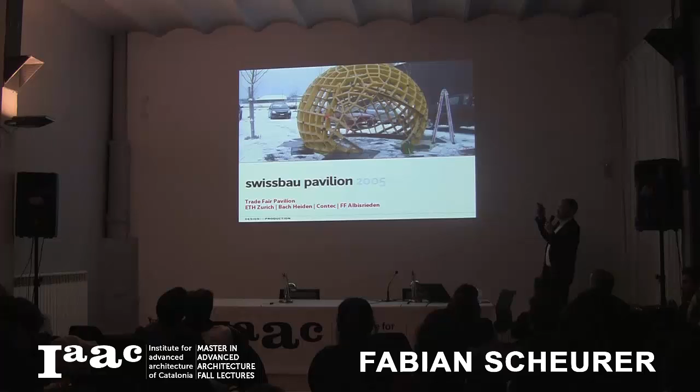And I start early on. As has been said, I was working at the ETH Zurich, at the CAD chair there, for a couple of years, and this basically is the first Design-to-Production project ever. Actually a university project that we built for the Swissbau Fair in Basel in 2005, out of the university's computer-aided architectural design chair. And the goal actually was to prove that there is something like a digital chain from design to production. So this is a small sphere about 4 meters in diameter. The idea was to have the sphere and a few square openings in that.

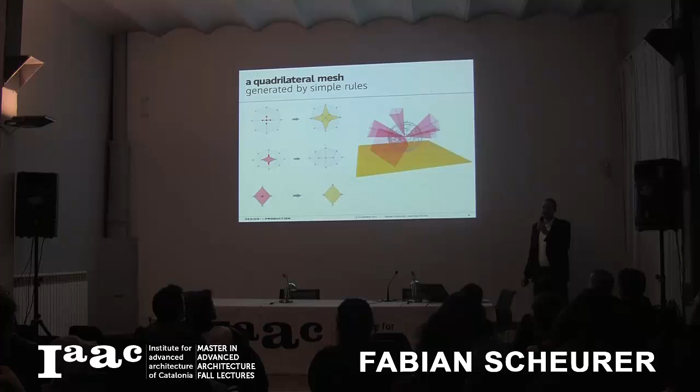And as has been said also, I was working on methods for artificial life or self-organization for construction principles. And this is basically the principle behind this sphere. There's a quadrilateral mesh growing on this sphere. In this little video you can see it here in real time, more or less, based on a few simple rules that ensure that the thing is always quadrilateral. And that was not just a nice idea. Triangulating a mesh is easy. Making a quad mesh on a sphere is difficult. No, the question also was, how do we build this thing in the end?

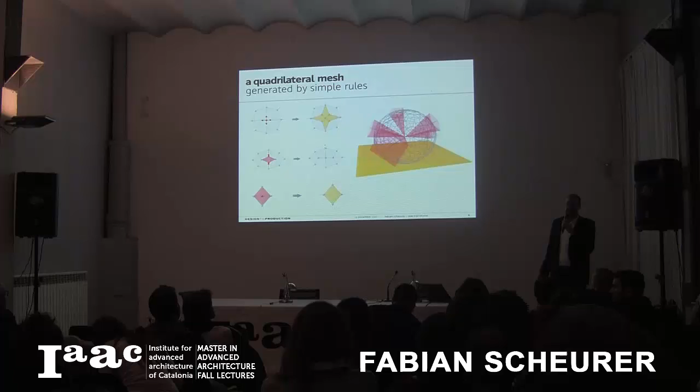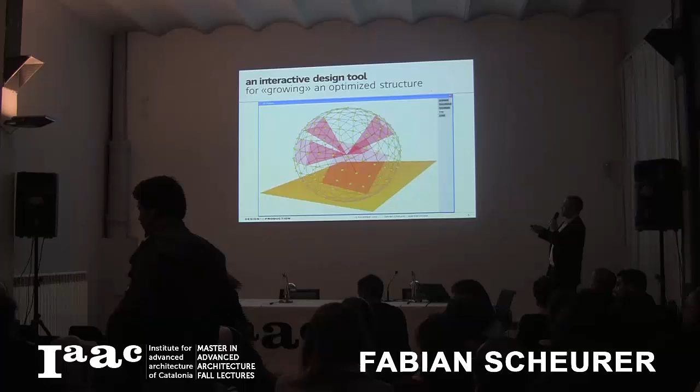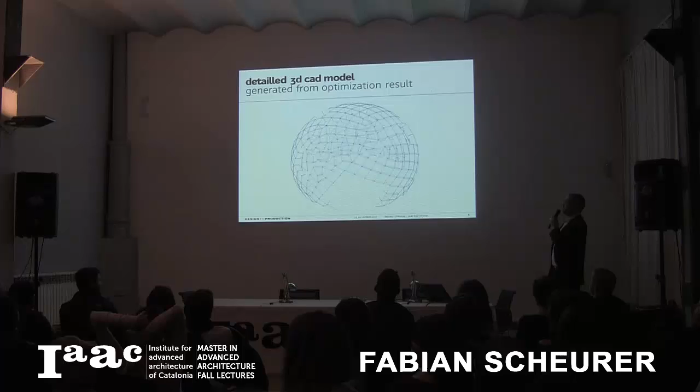The outcome of the software looks like this. This is basically the optimization result, and you can see that the edges of this mesh nicely align with these openings that we wanted to have in the end. A colleague of mine did a bit of scripting and translated this into a fully detailed CAD model of the whole thing. Then we put it down flat, all the nice pieces that had to be fabricated, and generated fabrication code for a CNC cutting machine directly from that.

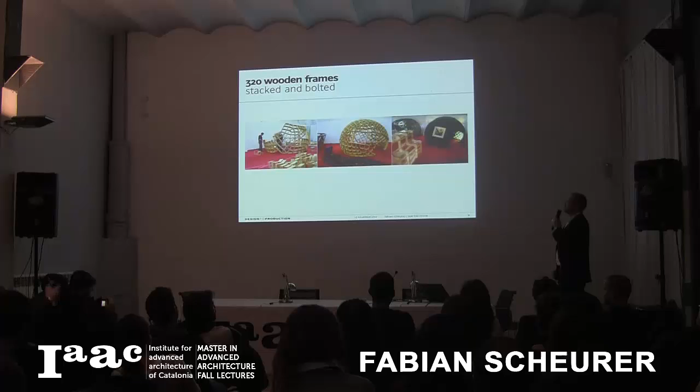We cut about 1,200 pieces, put them together in quadrilateral frames and stacked them like a big puzzle, one on top of each other. Looks pretty simple, actually looked pretty nice until we had to put this black membrane on top because one of the sponsors was a fabricator of membranes. The other sponsor was fabricating windows, as you can see. This is what it looks like from the inside, much more interesting.

So it's all quadrilateral frames, and the trick was that we had to fulfill certain requirements concerning the size or the length of the edges and the angles in which the four boards meet at the corners and stuff like that, and that was all embedded in this growth algorithm, basically, which was great for me because I was able to prove that my optimization software was working.

But also I learned another lesson, which is this so-called digital chain from optimization to digital detailing to digital fabrication, which is shown to you in slides of software representatives in this way, actually looks like that. It doesn't work that easy.

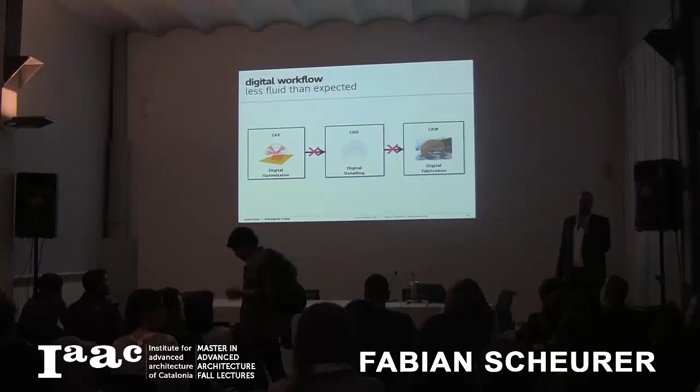There's a lot of handwork, manual work involved. There's actually a lot of project-specific programming involved because those interfaces simply don't work by translating one into the other and just shifting IGES or DWG or DXF or whatever files from A to B. Doesn't work.

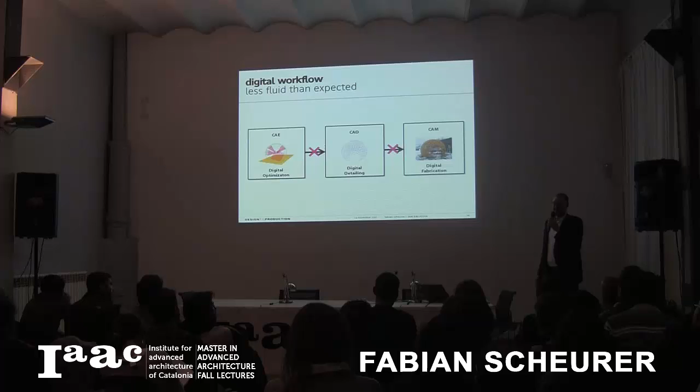One hint why that is the case is pretty obvious. There's too many degrees of freedom in the fabrication. If you have a laser cutter, you have two axes, X and Y, degrees of freedom of the laser cutter, and you have two dimensions in the material. Matches perfectly. Nothing can go wrong. If you have a three-axis mill, you have X, Y, and Z degrees of freedom in the three-axis mill, and you have three dimensions in the space you're working in.

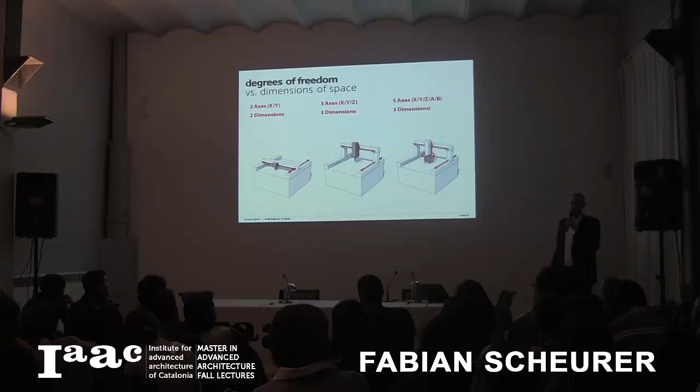If you have a five-axis mill, you have still 3 degrees of freedom in space, but 5 degrees of freedom in the machine. So, oops, things become ambiguous. Someone has to decide whether it's better to drive to this point from the left or from the right or from the top or from the bottom, which means software is not a good friend of yours anymore because this is getting too complicated. You need to know a lot about fabrication before you can start to work with a 5-axis machine, let alone a 7-axis robot like the one out there.

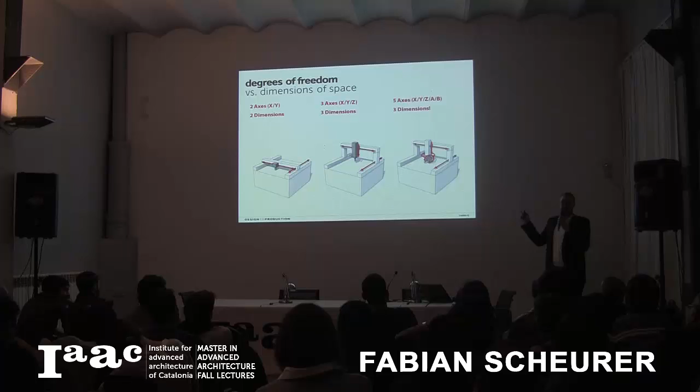So this automatic translation from, oh, we have a geometry here and we need a fabrication code for the machine on the other side, and we just push a button is not working. Very small, very early project, very, very good lesson learned there, almost 7 years ago.

Next project, still at the ETH, was this. This is an exhibition platform for the 4 schools of architecture in Switzerland. It was a traveling exhibition going once around the world, designed by a small practice in Zurich, Instant Architekten. Client was the ETH in Zurich. Fabricator was Bach Heiden, the carpentry that also built the sphere you've seen in the last project.

The thing is 40 meters long, 3 meters wide, and it's basically a landscape model. It's an abstracted cross-section through Switzerland, following the path along Geneva, Lausanne, Mendrisio, and Zurich, where the 4 architecture schools are. It started like this in the designer's office as a 1:50 model from cardboard and foam. And the question was, how do you build this on a real scale?

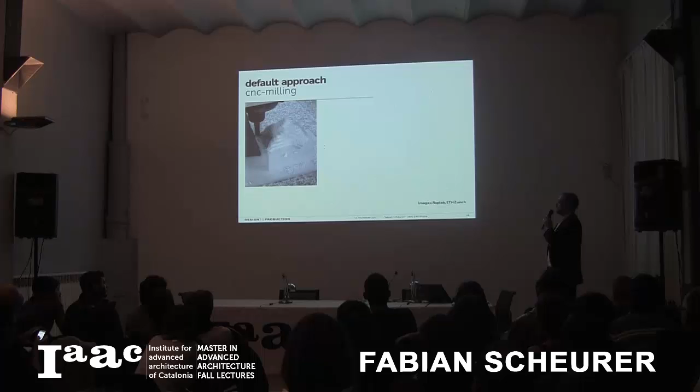I mean, there's a default approach for building landscape models, which is 3-axis milling. So you have whatever material, and you have a 3-axis machine, and you mill away a rough cut and a fine cut, and in the end it looks like that, the Matterhorn. Pretty straightforward. Question only is, if you have a 1:50 model, and it takes about 1 hour of milling time to do that on the machine, how long does it take to mill the 1-to-1 thing on the same machine? Any guesses?

It's actually pretty simple math. It's 50 times wider and 50 times longer and 50 times higher than the model. Times 1 hour is 125,000 hours, is just a bit over 13 years. Which means, no, not on the same machine. You cannot mill this out of foam and then coat it with fiberglass or whatever to walk on. You have to think about fabrication methods that are different than the model.

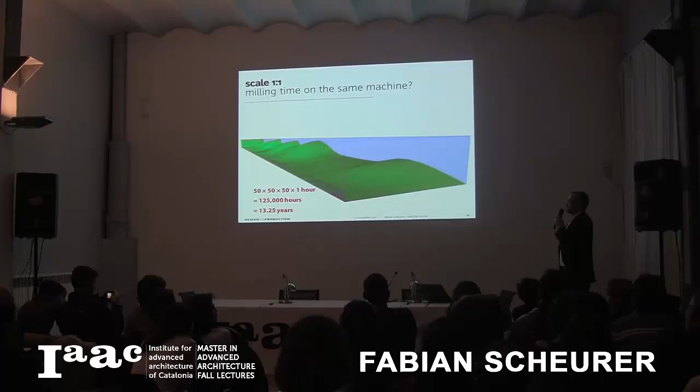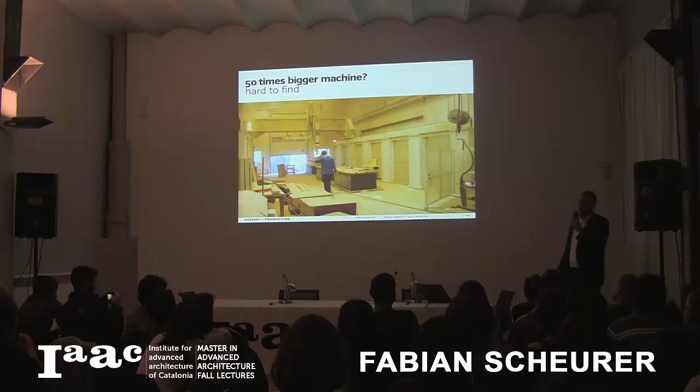Which means, oops, you can either try to find a 50 times bigger machine. This is pretty much the largest 5-axis mill I've seen in my life. It's in Norway in a boat builder's workshop. They're milling foam cores for race boats on this. At the time we were visiting them, they were milling the balconies for the Oslo Opera by Snøhetta out of oak.

If you have a 50 times bigger machine, you have to have 50 times bigger tools if you want to reach the same speed, which means your little tiny milling bit is becoming 50 times wider. This thing is only 15 centimeters in diameter, milling tool, which gives you a much lower resolution than you had with a smaller tool. You're seeing the traces here.

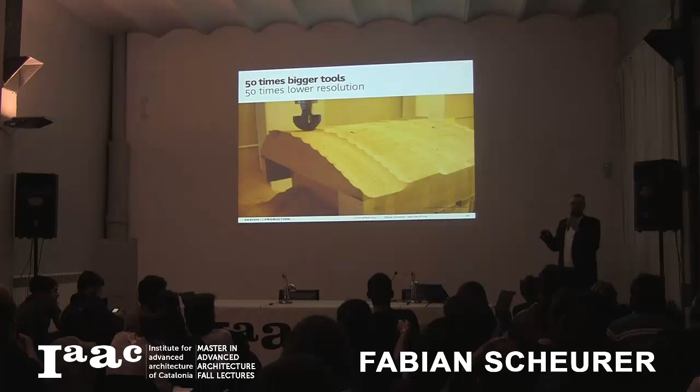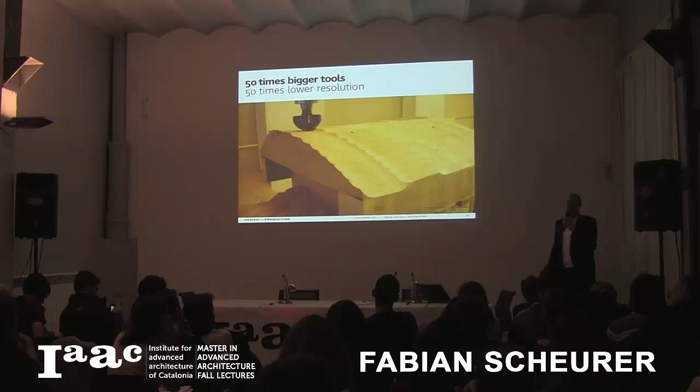And to reach the same speed again, in terms of I want to mill the whole thing in 1 hour, you have to move this tool at 50 times the speed than the small machine, which means you have to accelerate it on this end of the machine, like a Porsche on a German Autobahn, and then you have to make full stop on the other side, 15 meters to the back, turn around, and go back, which is physically impossible.

So instead of finding a 50 times bigger machine, we took a different approach. We took the cookie cutter, as we call it, and cut the whole thing in vertical slices of 40 millimeters. So 40 meters divided by 40 millimeters is 1,000 slices.

You get 1,000 individually curved rafters if you lay them out flat, 90 degrees on the side, and nest them nicely on 126 boards of 40 millimeter MDF. You can cut them on a 5-axis machine, one by one, and stack them nicely, like this.

And you see there's a little detail here that sits on a vertical piece in the end, and you have little dowel holes that ensure the positioning of one piece next to each other, and then you can just put them one next to each other. They're nicely numbered, of course, and you get your platform. And then you put an Alphorn blower on top of that, representing Switzerland somewhere in San Francisco at the opening of the first exhibition, and there you are.

The nice thing that happened here is that by having those beams coming from the left and to the right and basically overlap in the middle where the people were supposed to walk on, we didn't even have to paint the path and keep people from walking on the sides because no one will step on that. There's gaps in between. It works like, the cows won't go over these grids. Swiss tricks.

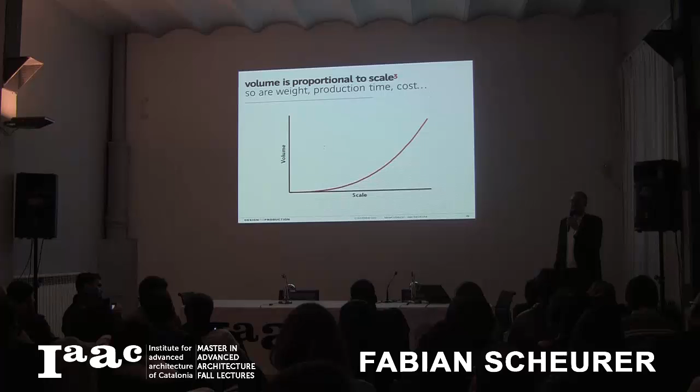So, next project, still university. 1 year later, the University of St. Gall approached us to build a sculpture for Daniel Libeskind, who had designed this thing as sort of a representation of the future of the city, because he was hosting a workshop at HSG in St. Gall, Futuropolis. They had tried to find somebody to build this within reasonable budget and time and didn't manage to, and one of the doctoral students at the HSG who was at the ETH beforehand called us up and said, hey, you're doing crazy stuff like this. Any ideas?

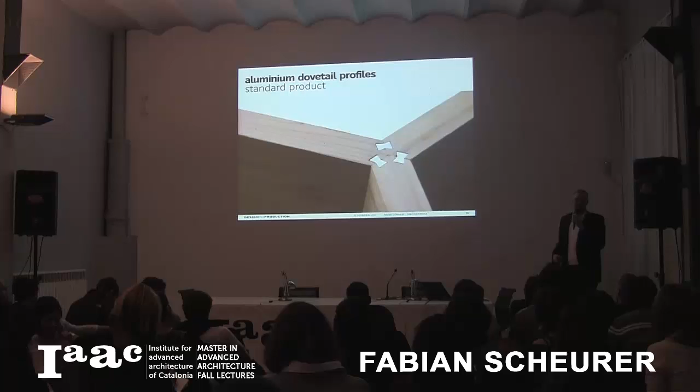And that saves an enormous amount of time just by the fact that usually if you want to connect timber pieces, you have to put glue on both ends, and then you put them together, and then you have to clamp them and wait until the glue dries for at least half an hour until you can work on. One of the towers contains about 20 timber pieces. If you wait half an hour after connecting every single piece, it'll take a year or two to build the whole thing. Now you can put glue on both sides, put them together, drive in the dovetails, and then you're done. And then you can go on to the next piece.

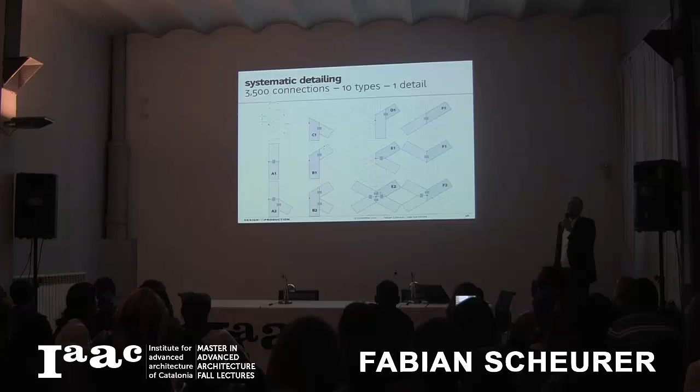And this is how the notches get milled on the machine. This is how the assembly actually looks, with nice little Lego-like plans, numbered pieces again. And the problem, of course, is you have to come up with some sort of systematic detailing. You have about 3,500 joints in there. And at first sight, they all look different. If you look closer, you identify only 10 different types of joints, and you only have one detail, namely this little dovetail joint here.

Only because they're cut at more or less arbitrary angles, they look this distorted, and also almost look like a design feature in the end, which is much better than having screws all over the place. This is the end result.

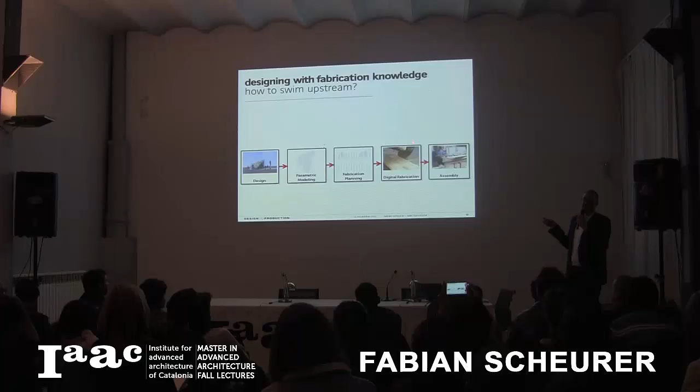And the question here is, of course, okay, you have to come up with those details that save you a lot of time. If they only save you 2 minutes of waiting at 3,500 connections, you've saved a couple of days' work in the end. So you actually have to, at least up here, when you come up with the parametric modeling of the detailing, know about all the assembly process in the end, or you have to start thinking about that. Basically, you have to know about the fabrication and the assembly to develop the detail to go into parametric modeling.

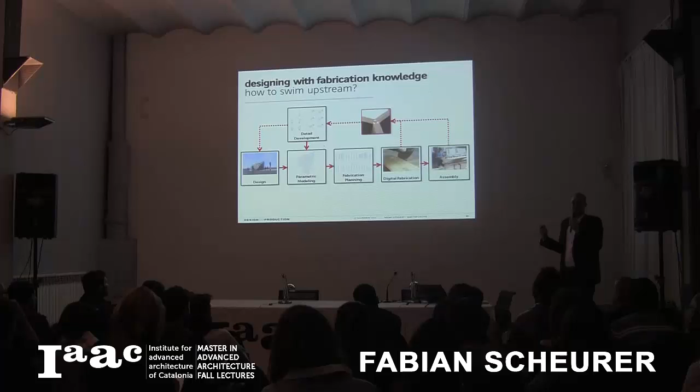Even better, you know about this at the design stage already, which is difficult. This is basically what we're doing. We're trying to swim upstream, know about fabrication, know about the detailing, know about the assembly, know about the whole process, and try to help finding nice little intelligent, simple details in the first place.

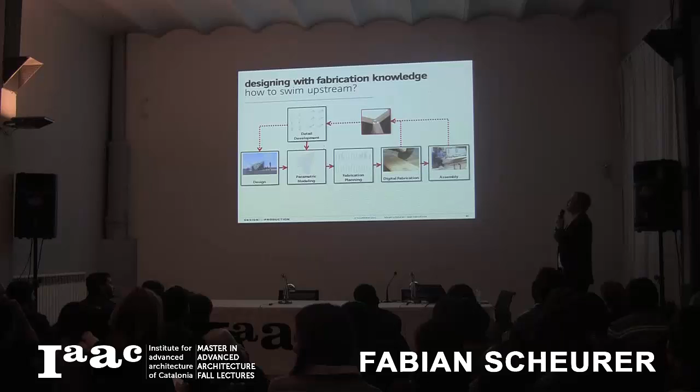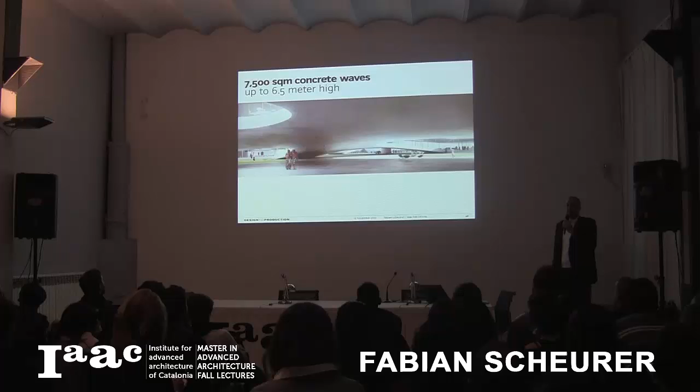Okay. Scaled it up a bit. This is the EPFL Rolex Learning Center, aptly named after the sponsor. Money was not an issue there. By SANAA, engineers Bollinger and Grohmann, general contractor Losinger, and we were actually only involved in the formwork for this concrete slab you see there. The whole thing is a one-story building, basically, with 20,000 square meter footprint. It's a library, working space, cafeteria, basically a learning center.

And it's a steel structure with a 9 by 9 meter grid of columns that stands on a large concrete slab that is undulating up and down 6.5 meters. This is a rendering from the competition. And the good thing with concrete, of course, is you can cast it in any shape you like. The bad thing is you need something to cast it into, which means you need 7,500 square meters of formwork to cast in a couple of thousand cubic meters of concrete.

The idea of the engineers and the general contractor was to divide the 7,500 square meters into 2.5 by 2.5 meter squares. And on every one of those 1,500 squares, there is a timber box built from 6 or 7, depending on the inclination, vertical timber cleats, and on top of that, a sheet of plywood. And the whole thing is standing on a standard scaffolding tower that's missing in this picture here.

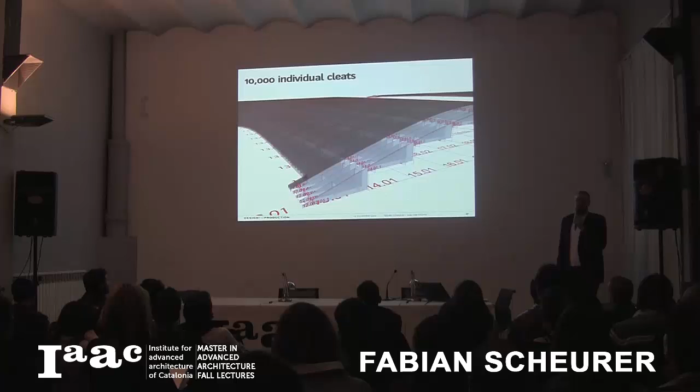So you scale it up, and you have 1,500 boxes, and that means you have about 10,000 of those timber cleats, and unfortunately, they're all individual. Which means you need a digital model that holds all of those 10,000 pieces, because everything that has to be digitally fabricated in the end has to be digitally modeled first, which is a pretty big size for a model. So this is 10,000 timber pieces in there with a bit of detailing, something that you actually have to hold in a computer's memory, which is not that easy.

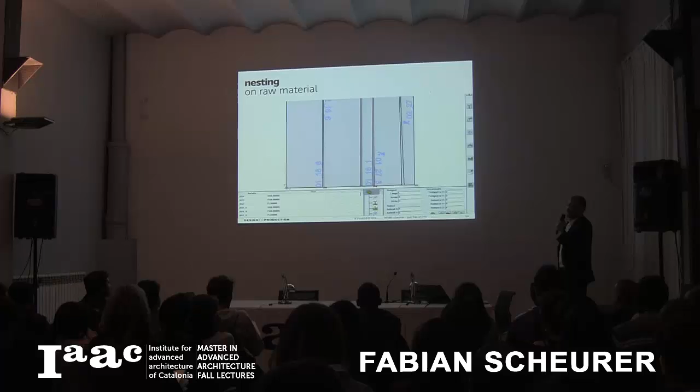But out of this model, you can then, of course, extract everything you need. You can extract 1,500 drawings for the single boxes, for the assembly and the quality management. You can extract whatever lists you need for ordering the scaffolding towers or the material or setting up the formwork. You can extract actually the machine codes again for cutting all those 10,000 pieces, which look like that. This is one of the pieces with the numbering nicely. You can nest that all on raw material and then put it into a 4-axis cutting machine, number it nicely, and hopefully don't make mistakes.

We always urge people to actually mill the numbers into the pieces. Usually they won't do that because it takes too much time. They have to change the tool, and then they have to mill the number. It again takes a few seconds. At 10,000 pieces, a few seconds per piece make a difference. But then you have to be pretty sure that the guy standing right next to the machine is writing the right numbers onto the pieces in the right place, because sometimes it's really hard to see, they're almost rectangular, what the orientation of the piece in the final assembly is going to be.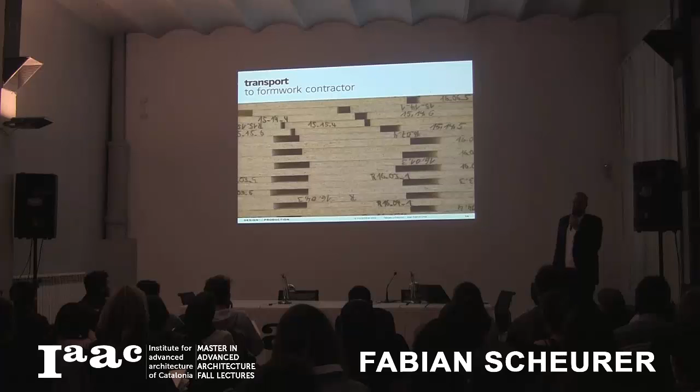Yeah, you stack them nicely, and then you transport them a couple of 100 kilometers from the cutting to the formwork contractor. And then they start assembling boxes, one after the other, with a little jig here so they don't have to measure, which is very intelligent, because at 1,500 boxes, if you have to measure all the pieces, it's stress. Now here, you just have this steel jig around, you put in those yellow timber beams, and then you shoot the thing together with your nail gun.

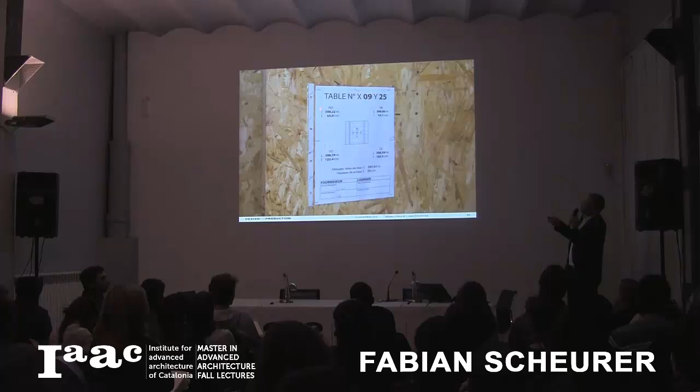There you go. They're 2.5 by 2.5 meters, simply because that fits on a standard truck nicely. Every single one of them gets a little sheet with, of course, the table number and basic measurements in the corner for quality control in the factory and on site. So there's the absolute coordinates above sea level here. You can basically put a geometer on every corner of the formwork and measure if it's all right. You can sign it off if everything's okay.

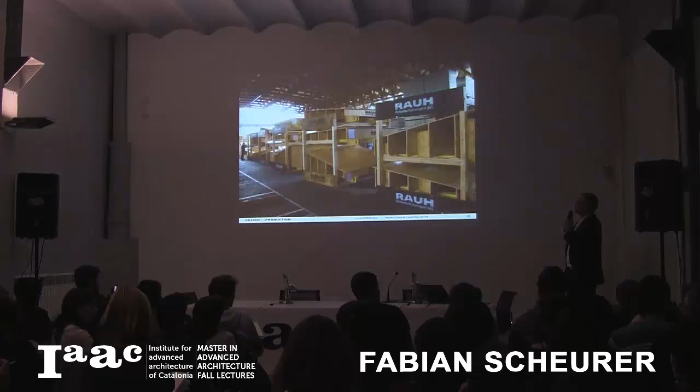Then you stack them on trucks, 150 truckloads from close by Bern to Lausanne. And then you put them on the scaffolding, one after the other, have a smoke. It looked pretty impressive, I have to say. It's got two parts. It's the smaller part up here, basically finished. This is the larger part, where you can see here is still the scaffolding. Here the table's already there, and here the rebars are already in.

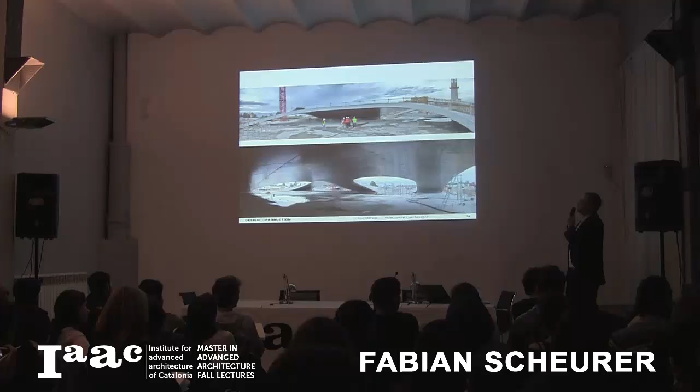The interesting thing is that for quality reasons, the whole thing was cast in one go. So the whole area here was actually one casting. It took about 48 hours, I was told. I wasn't there. And they had a constant flow of concrete trucks just coming in, pumping all the time. Then you take out the formwork, which is not needed anymore. It's actually our first big timber building that we did, but unfortunately it's not there anymore. Here, this is it. And this is what it looks like now.

So probably the next lesson learned from this project would be only lean models are good models. I'm not talking about Naomi Campbell, I'm talking about digital models. You have to put everything that you need to cut, drill, whatever on a digital machine into a digital model. Anything that is not defined on a digital side in the model is not being cut on the machine. So you need a model that holds 10,000 timber cleats in this case, which means you have to really think about what you put into the model and what you leave out of the model, because it makes it clumsy and slow and too fat to stand upright if you put in just everything you know. You have to really think about what you leave out. That's the main problem in many of the projects we were working on after that, because they tend to get bigger and bigger and bigger, you'll see.

But in the first place, a little step back to a very small project, one that we did together with the Technical University in Trondheim in Norway. It was a very important project in two respects. First, it was our first real timber project that we tried to work on those kinds of machines, digital joinery machines for timber building. Usually what they do is roof trusses and stuff like that. So this is two different machines of the same brand. The brand is Hundegger. They're holding about 90% of the world market share, so you'll hardly see any other machines like that in the timber industry. Nevertheless, I'm going to show you a different one later on.

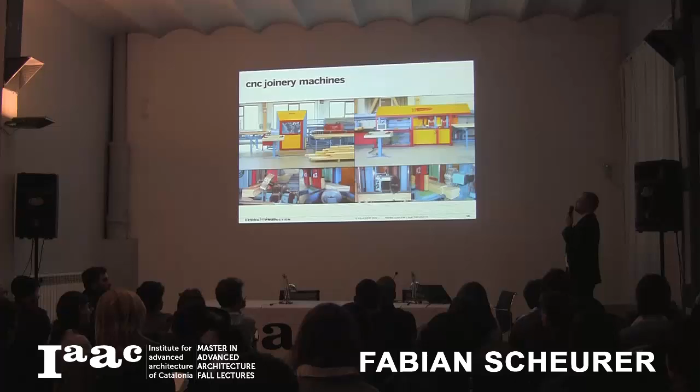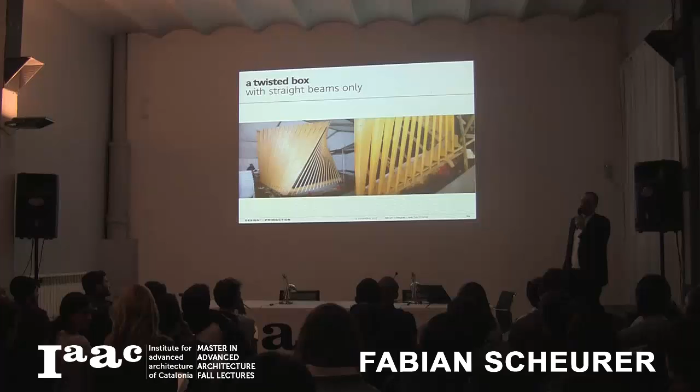We were so happy with working with timber, but we were pretty unhappy with working only with straight sticks. So we decided to call up all the timber fabricators that we could find that ever worked on curvy stuff. And the second, I think, that we called up was Holzbau Amann, who worked on the big roofs for the Expo in Hanover 2000. You probably have seen them by Thomas Herzog.

So we found this project, we found the name of the timber guys, we called them up and said, hey, we would like to do a presentation at you because we want to show you what we're doing and we want to do a project together. And then we walked in, managed to do half of the presentation, and I stopped and said, you can stop now. We just signed the contract for this, and we have no clue how we do it.

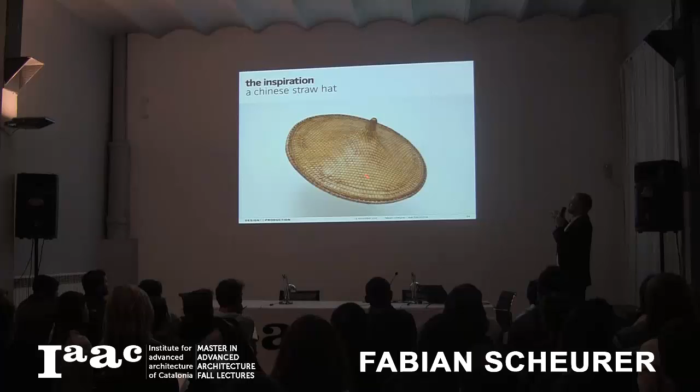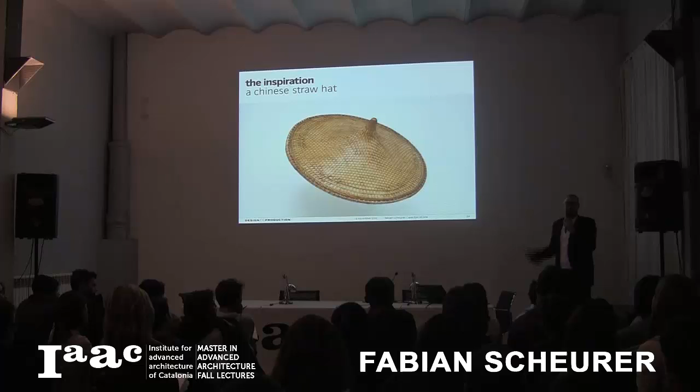The project is based on this Chinese straw hat. The legend says Shigeru Ban found it on the flea market in Paris and liked it very much. If you look closely, you see this triagonal, hexagonal pattern that you can find here. It's proudly displayed in Metz, where I took this picture. So this seems to be the original straw hat inspiration.

The only thing is, when Holzbau Amann entered this project, they got the geometry as a 3D model from the engineers, and what they gave him was a DXF file with straight lines connecting those points here. What Shigeru Ban wanted, and you can see that, is continuously curved beams, which is sort of a discrepancy here.

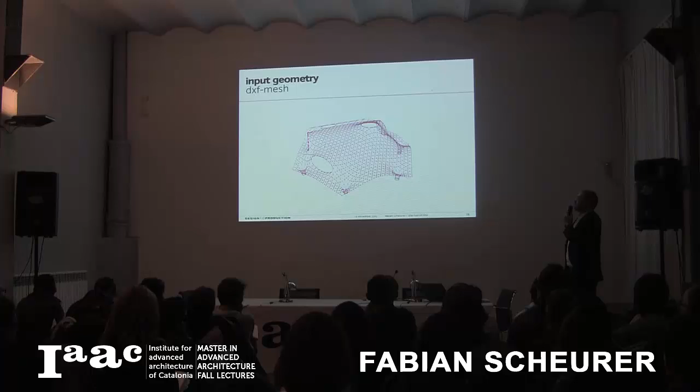We tried to smoothen out the worst kinks by a bit of dynamic relaxation. So we took the whole thing as a minimal surface or a membrane basically and tried to relax it a bit, which worked actually quite well, but came too low in a few corners over here where the surface obviously had been designed to fit the HVAC underneath. All the climate things didn't fit after we relaxed the thing.

In the end, we actually needed help from specialists from the automotive industry to take this relaxed point cloud and reconstruct a nicely continuously curved NURBS surface that we could use as a reference for the geometry of this straw hat. To then, from that, generate about 18 kilometers of continuously curved girders, which is pretty straightforward if you know the rules to follow, but leaves you at the next problem.

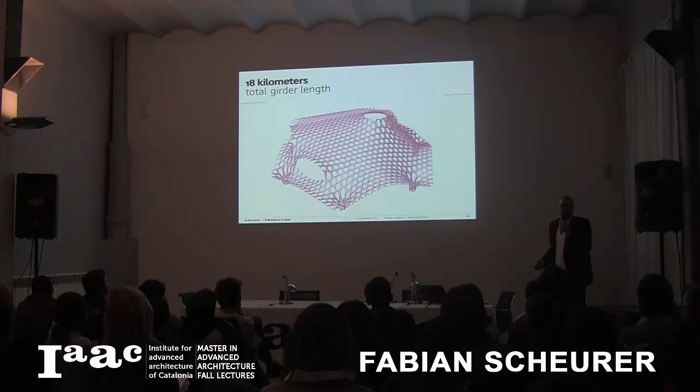Those things are up to 80 meters long. To fit through a fabrication machine and on a truck to be transported and to handle them on site, you have to chop them up into smaller pieces.

The cross section is about 14 by 44 centimeters. So there's nothing like weaving anymore in a straw hat. Those are really stiff. That means they have to be cut into shape before you bring them to site. And there are a few constraints concerning this segmentation process that we had to go into. One of them is an economic side.

You can cut a curved thing out of a straight beam unless it's too curved. If it's only slightly twisted, no problem. You cut away probably 20 to 25% of the material, and then you have your curved thing. A straight glue laminated blank comes at around 400 euros per cubic meter.

If the thing gets more curved, it doesn't make any sense to actually cut the whole curved thing out of a straight beam because you're cutting away 80% of the material. And what's even more important, you're cutting the fibers of the material.

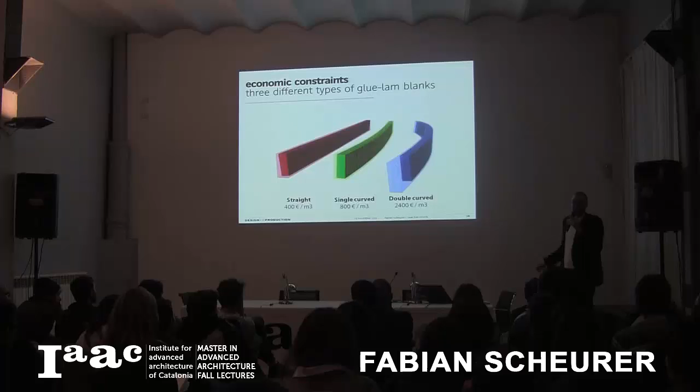If you cut a curved thing out of a straight thing, you're cutting the timber fibers, which means you're actually cutting away the strength of the piece, which you need to get the roof standing. So you have to laminate a curved blank to mill the curved piece out, which comes at more or less double the price. If it's even more curved, you have to laminate a double curved blank, which is possible, but comes at 6 times the price.

So it makes a real difference to decide where to cut those 80-meter long beams into segments, because due to the geometry of the part, it can be fabricated from either a straight or a single curved or a double curved beam at 100%, 200% or 600% the price, which is a nice optimization problem.

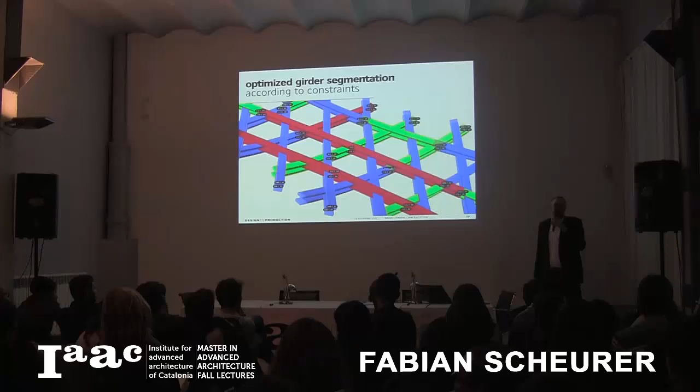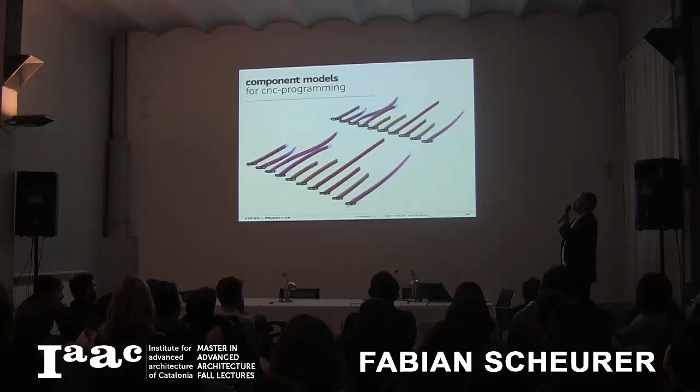Next to a few others, those pieces have to be short enough to fit on a truck, they have to be straight enough to fit through a machine, and a few other things. There is a long back and forth between the engineers, the fabricators, ourselves, and anyone else involved in the process. But in the end, you have pieces like that go into CNC fabrication. This is only a small sample. It's been about 1,800 of them.

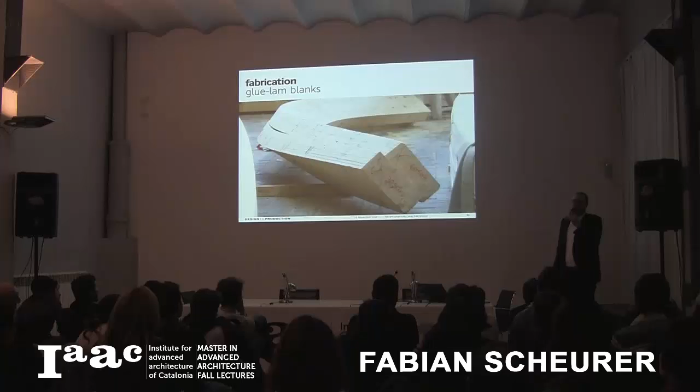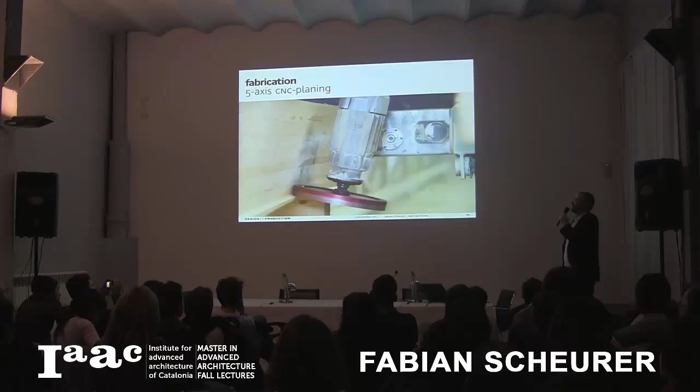This is what a doubly curved glulam blank looks like. If you look very closely, you see that this is actually laminated together from 2 by 2 centimeter lamellas, if you want to call them. This is what the planing process looks like. There you have this disc with about 40 centimeter diameter, taking away the material.

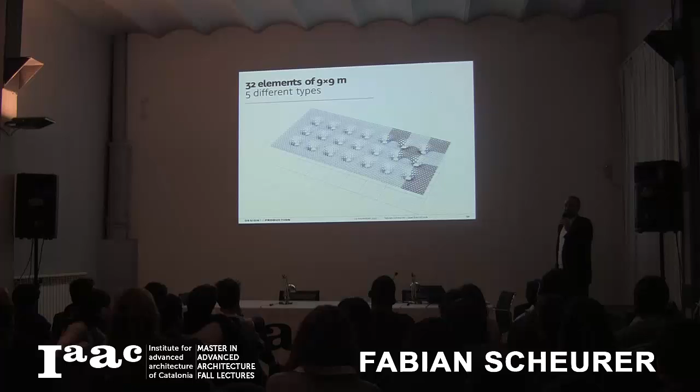This time it's more regular. This is a very rectangular grid of 9 by 9 meters with 32 elements of 9 by 9 meters footprint. Actually only 5 different types because they're repeating. Looks much easier. It isn't, because this time the girders are not nicely passing each other. They're intersecting, which means you have 5 layers of beams with lap joints in between, 15,000 of them on the whole roof.

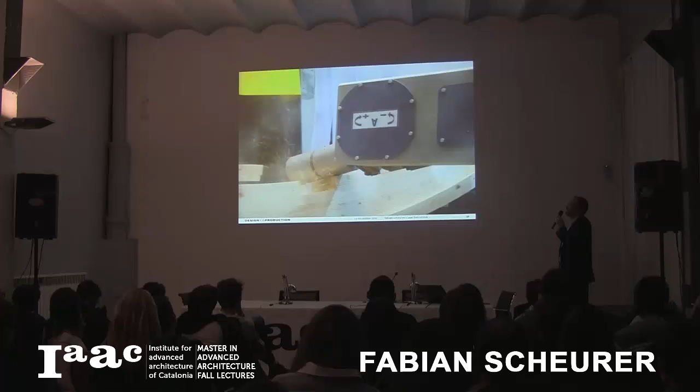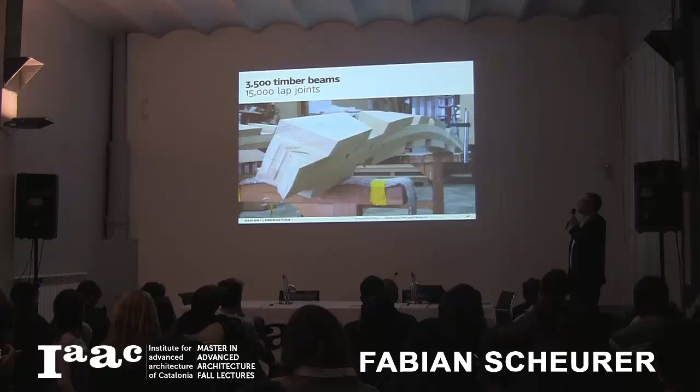This is what you know already. You have glue laminated blanks that you put into a machine like that. Looks a bit newer this time, different fabricator. And then you cut all those lap joints and details directly on the machine. Planing. And out comes a beam like that. 3,500 of them. You box them into containers and then you send them off to South Korea.

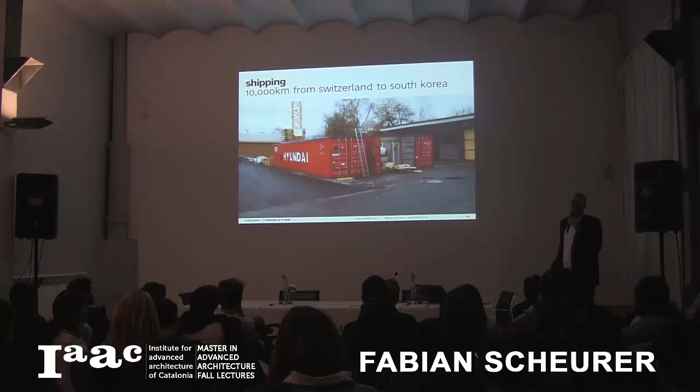While they're on the way, you do a bit of other things and then you ship 30 timber guys from Switzerland right behind them on the next plane to pre-assemble those crown elements. They have the footprint of 9 by 9 meters, so 81 square meters. This is basically the size of a nice single family house dangling on the crane here. They're pretty proud. This was the first thing you can see here. On the second one, they had the South Korean flag.

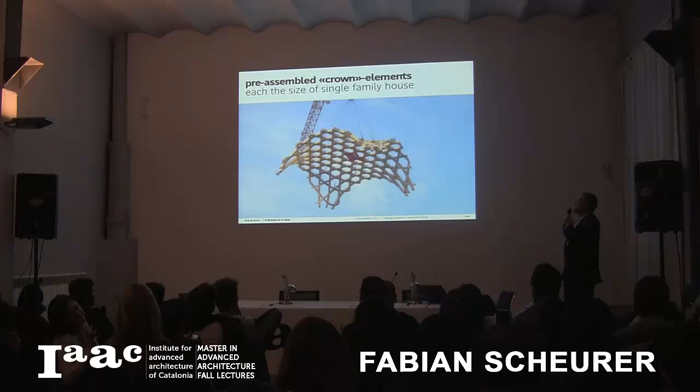And then dangling on the crane, you put one next to the other to build this roof on 21 columns. And the interesting thing here is, this is the connection point between 2 of those elements, and you have a 2 millimeter gap between those elements. So you have a single family house on the crane and you put it down with a 2 millimeter gap on either side. And it works. I was amazed. I wasn't there, I just saw the pictures. This is what the end result looks like.

But on the other hand, it means you're actually moving the whole work forward. You have to really detail the things down to the very last millimeter, to every single connection detail. Digital fabrication always means prefabrication. The machines usually don't stand on the construction site. They're not even close to the construction site. In this case, they were 10,000 kilometers away. So you build all those components nicely and intricately detailed. You put them in a container, you ship them somewhere, you erect it, and it either fits or it doesn't.

And if it doesn't, you don't have any chance to change anything anymore, other than flying back 10,000 kilometers, switching on the machine again, and then probably checking into the first-class flight from Zurich to Seoul with the timber piece. And that means you're not spending any money on the construction site anymore. You spend the money way beforehand in the planning process, which means you have to think about your usual budgets that you have in the building industry. 30% of the budget is spent on site. Planning budget or architect's budget. It is not happening anymore. Prefabrication works completely different.

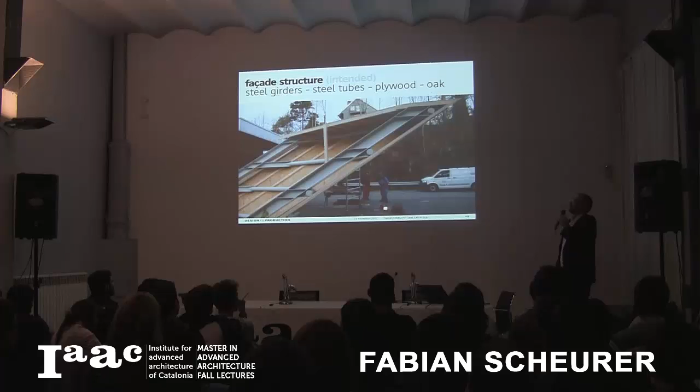This is one of, I think, 2 mock-ups they built in Norway to find out it doesn't work like this. The problem actually is that there is CNC bending of steel tubes, but from a certain dimension on, you can only bend arc segments, which means if you need to have a continuously curved beam, you have to cut it into short segments and then weld it back together, which means in the end you would end up with about 3,000 segments that have to be welded together.

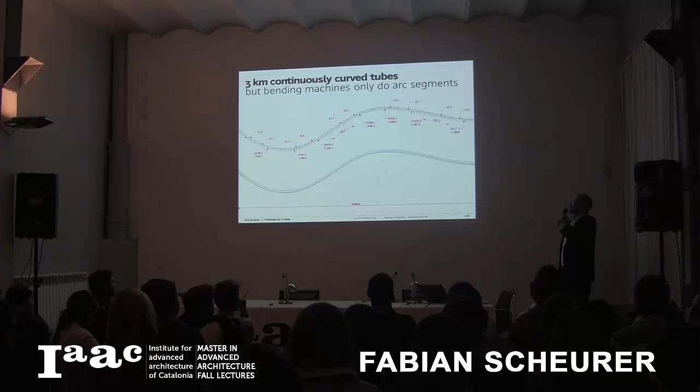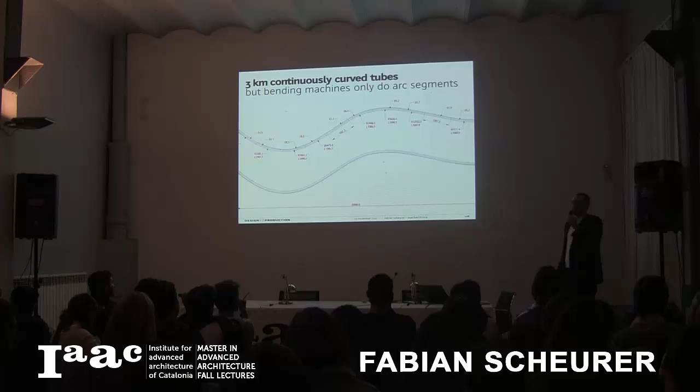And if you know about welding, you know what that means for precision and tolerances. It doesn't work. It doesn't really work, because the idea of the architects was, it's hard to see here, that you have a nice pinstripe outfit actually on the outside with 10 millimeter gaps running up the whole facade in straight lines.

And then one day I got a call from the timber guys in Norway that we worked with on this camera obscura project 3 years before that. I'm saying, I've seen 2 of those mock-ups that don't work. We have to do something. Would you help me to convince them to build the whole thing out of timber? Because, as you've seen already, you can put a timber beam into a CNC machine and basically cut every shape you like out of the timber, which means continuously curved beams are not a problem at all. This is what it looks like.

And then you only have to convince the guys that you're not building the whole 3,500 square meter facade on site with a large scaffolding underneath, but you do a prefabrication concept like this with 126 facade elements that are all built after this principle, with 2 straight beams and a series of curved beams and up to 180 oak boards that actually are the visible skin of the whole thing on the outside. Every element is hanging on the steel structure that is still there, so those are the timber beams, and it's completely prefabricated on digital machines and pre-assembled and shipped to site.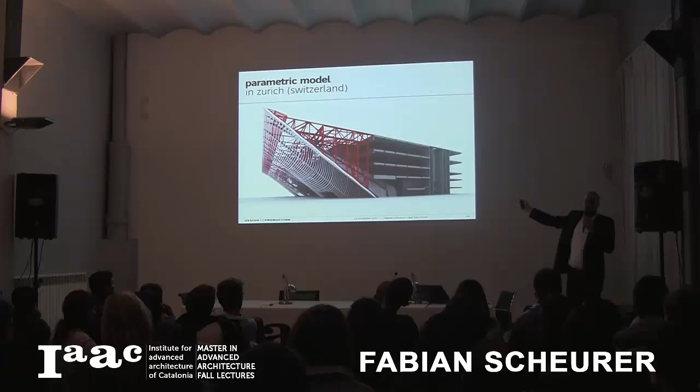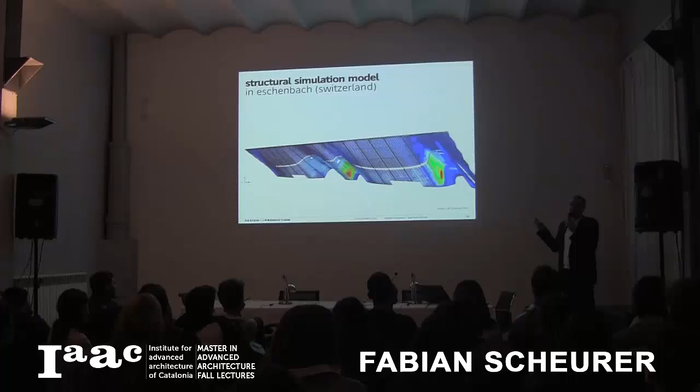There was a parametric model of the full thing in Switzerland at our office in Zurich. So the red part, the concrete, was basically almost on site when we entered the project. So the box was there. The steel structure was more or less lying on the ground, completely planned, but not yet erected. And the white part here is the timber part that we still had to design at this point, which was sort of a challenge, because you had to tell the steel guys where to drill the holes to connect the whole thing before you even had the structure designed. But anyway, we had a structural engineer close by Zurich in Eschenbach in Switzerland who did the complete modeling of the thing, which was also a challenge.

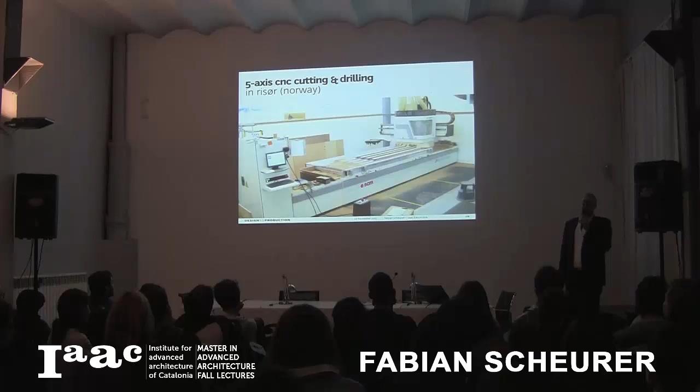And we had again this 5-axis machine in Switzerland in Gossau that did all the curved pieces, which looked like this, 1700 something. We had the boat builders up in Norway with a machine like that, who cut 12,500 oak boards to measure, because of course they also were all different, always 4 at a time. Looks like that. Already with the holes to screw them to the main structure, nicely numbered. This time again the numbers in the material. I'm so glad.

Then everything gets shipped to Norway to the boat builders, including the straight beams. They were cut at Trebyggeriet in Norway. So we had 3 different fabricators basically in the project, 2 in Norway, 1 in Switzerland. They put together those frames with little laser reflectors here to measure that they were precise. You can see they're standing on jigs here that were also planned in the whole thing.

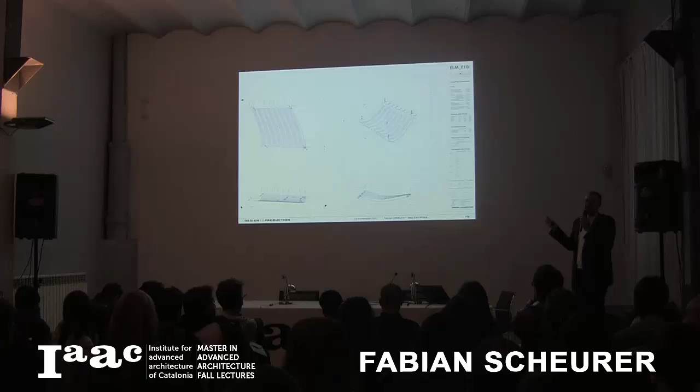And every connection here is basically self-positioning. So there's always a little slot where things just snap together, which is really important, because if you want to build those things, you cannot measure. Everything is curved. With your meter, you don't have any chance to actually measure exactly on this structure. That means to put up 12,500 oak boards onto the structure had to be done without measuring.

Which means for every oak board there's a little seat cut or notch in every one of the curved beams, summing up to 55,000 something. The timber fabricator in Switzerland almost fell from his chair when we proposed this. Said 55,000 notches, it takes about 5 seconds each. The rest is pure math. You can do it on your own. I said, that'll cost us a few extra weeks of work on the machine at 150 Swiss francs per hour.

Fortunately, we had a timber contractor that knew the whole process and said, yeah, but those guys here would add a few man-months of work when they had to measure all the boards in there. Easy calculation. We mill all the seat cuts, so that every single board just snaps into place without thinking. If you take the right board with the right number and you put it in the right place, the thing comes together like an IKEA shelf.

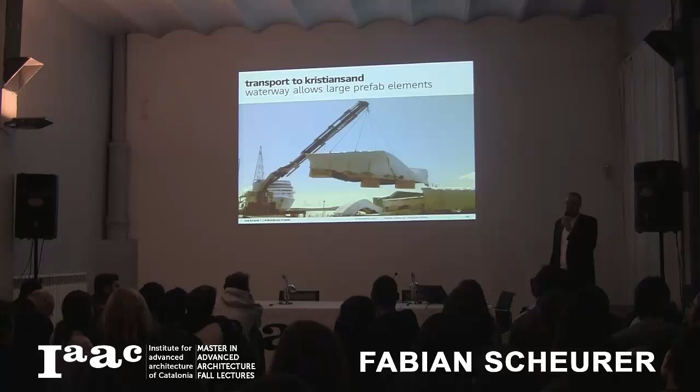A big IKEA shelf. Those elements are up to 50 square meters each, which means it's only possible to transport this in Norway because the building site is right next to the harbor, and the assembly takes place in the boat builder's workshop, right next to the water, of course. So we actually ship those things on big barges. No way that you can land transport that in Norway.

Again, assembly plans, and then you hoist up those finished elements into the steel structure. You see here the red things. There are, I think, it's hard to see, about 8 holes in every element, 4 on either side, to connect the timber to the steel beam. In the end, 4 people on site managed to erect 1 up to 2 elements a day. So they were quicker and quicker by the time.

And you can imagine what it means if you have the steel structure. The steel guys tell you, yeah, our tolerances are about 30 millimeters, plus minus 15, that we can manage to handle. Here you have those 10 millimeter pinstripes going down the whole facade, which means they should be continuous from element to element, which means you need to have a precision on the outside of plus minus 1 millimeter, basically.

That means you're measuring every single bolt hole in the beginning to ensure that they're at least within 15 millimeters plus minus, or otherwise the steel contractor would have to rebuild the whole thing, because that was in his contract, fortunately. The same thing happening with the glass facade, of course. Basically, the timber wall is interrupted at the glass facade. The glass facade goes through the timber wall with a 5 centimeter gap, like that. And this is what it looks like from the inside.

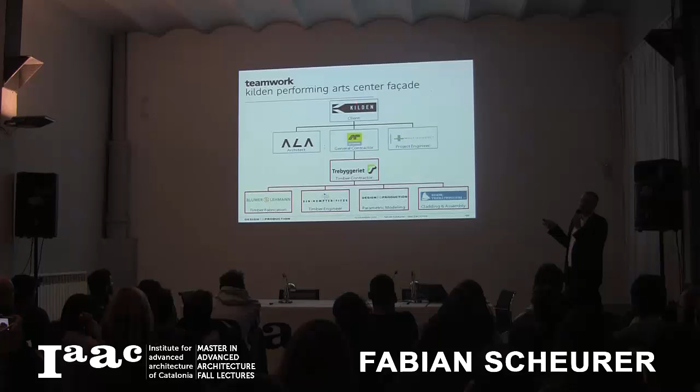So in this case, it was really important to actually have teamwork running in the whole thing. This is what it looks like finished. And this is what the team looked like. So you have a client up there, a general contractor, an architect, and a project engineer in Norway. Then you have a timber contractor in Norway and a timber fabricator in Switzerland, an engineer in Switzerland, us in Switzerland, and the boat builder guys in Norway. And somebody has to figure out all the interfaces and the communication so that everything fits together on site in the end.

Which means the old model of having design, engineering, detailing, fabrication, logistics, assembly, only talking to each other via this interface is not working anymore. You have to come together. Half of the time we were working on this project, we spent in meetings either online or actually sitting around the table to find out how we do things, how we can fabricate things, if we do those 55,000 seat cuts, how things are assembled, how things are brought to site, what the maximum size for transportation is.

And that means you have to talk to the people. If you really want to reconnect design and production, you have to talk to those guys a lot to find out what they know, because they will tell you. Unfortunately, most of them will only tell you if they have a contract, of course. But in the end, they're telling you their best tricks, and this is what we actually want to do. We want to get the best tricks out of those guys and get them forward in the design process to find good designs, good detailing, good fabrication methods. Thank you.

I hope there's some brains left for questions.

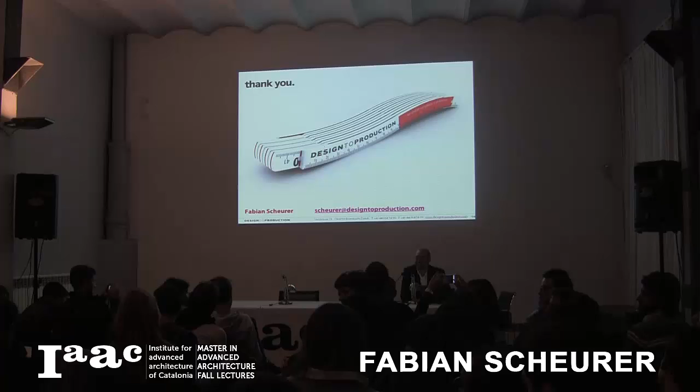You have shown us a lot of curved beams, double curved beams, CNC milled, but you also showed bent wood and laminated wood beams. How does this work, CNC bending and laminating, so that you come to a tolerance that fits the project? Yeah. That's the main difference between timber and steel. You can bend steel tubes, steel profiles, and you can bend timber lamellas to laminate curved beams, and you have the same problems on both sides. Namely, the tolerances are within probably plus or minus 5 or 10 millimeters.

Because also with the lamination of the curved beams, you have to imagine you have straight timber lamellas. You put them into a pressing form with glue in between, and then you close the press and leave them in there for a couple of hours until you put them out. And as soon as you open the press, the whole thing springs back a little bit, which means it's mainly a matter of experience to get the shape that you actually want, both in timber and in steel.

The good thing with timber is you can take the timber beam, which is within probably plus minus 5 or 10 millimeters, and put it into a CNC machine that mills it down to probably 5/10 of a millimeter precision, which is what you can't do with an I-beam that is curved. Which means you reach completely different tolerances or precisions on the timber side compared to the steel side,

especially when you take into account that you can also fabricate all the detailing directly on the same machine on the timber side. So all the slots and notches and drilling holes and lap joints and whatever is directly fabricated on the machine, which gives you a completely different approach to connection details in this field. This is basically the main difference, and this is why we have so many timber projects at the moment, because it's a great material to build around curves with high precision.

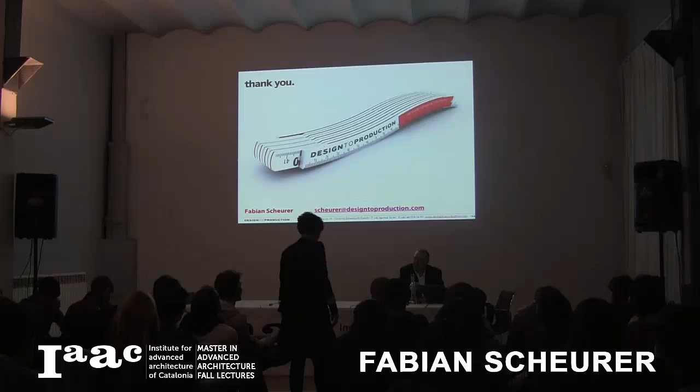So I guess it's all this theory-practice gap, basically. In theory, it's perfectly possible to measure the things first and then start fabricating. In practice, it's not possible, at least not on this type of structures. That means somehow you have to close the cycle. Sorry, long answer. I have to get shorter.

Yeah, thanks for the amazing lecture. I think any question will sound naive with the massive work. There's no stupid questions. Go forward. There's only stupid answers.

I was wondering, this is more like a theoretical question. It's related to the fact that the name digital fabrication is talking about some process that is not digitized yet. We are having digital information using computer-controlled machines, but then at the end we have analog materials. We have very stupid materials that we are cutting with very expensive tools that need to be controlled in a very specific environment, as you said now. How do you see it evolving to really become digitized?

I don't know if your research is somehow envisioning how you can put code into materials and how you can program the materials themselves in order to build self-assembly structures and things like that, more like the nature kind of thing. Yeah. There's a lot of research going on in this field. We're more concerned with the practice of building, which looks completely different at this stage, at least.

It's a matter of budgets, it's a matter of time, it's a matter of skilled labor or unskilled labor. Most of these rocket science ideas and materials simply don't fit the budgets in all the building projects you know out there. That's one of the main things. So all the ideas of shape memory alloys, carbon fiber, and so on are fine within Formula One racing, but probably not within building large-scale structures, simply because of the budget. Also because it doesn't fit the process around it.

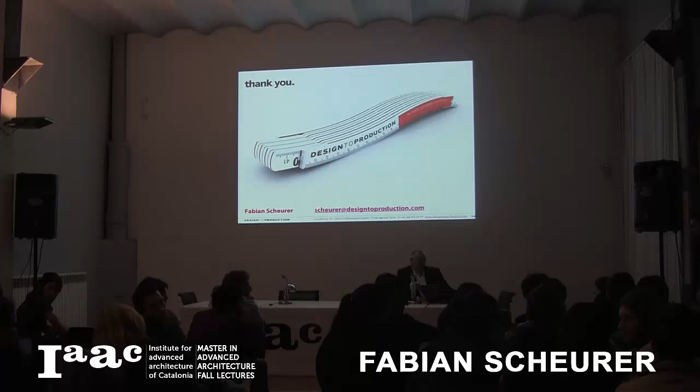The question is, after all this work that we've seen, that you have worked with one of the most important architects nowadays, and we hear you criticize in some way the huge distance between concept and fabrication process. So the question is, what's next in design to production?

The next step actually would be nice to talk to the architects in the first place, because I rarely ever meet them. We're doing a lot of work in those projects after tender, only working for the fabricators. The first time I met Shigeru Ban was about 2 months ago at a speech he gave in Zurich. And he probably doesn't remember me. Which is okay for me. I understand myself as a service provider to architects, engineers, and fabricators.

At the time being, I'm being approached mostly by fabricators who have to sort out things that land on their desks. I would like to work more for architects, but there is sort of a collision, not with the process of architecture, but with the process of building, which means we're spending all the money at the end of the process, not at the beginning of the process. And that's basically the next thing that has to happen.

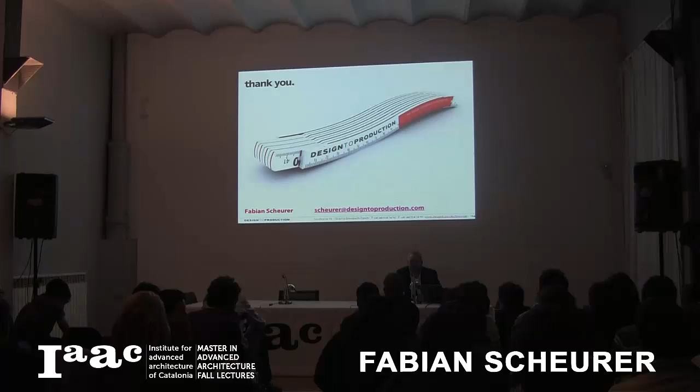After all, it was about 20,000 square meters of plywood, which is an amount of timber that basically grows in Switzerland within 10 minutes. And the rest is a bit of effort for fabrication and stuff like that. Another good argument for timber structures, I'd say, even if you take them away and just leave the concrete there,

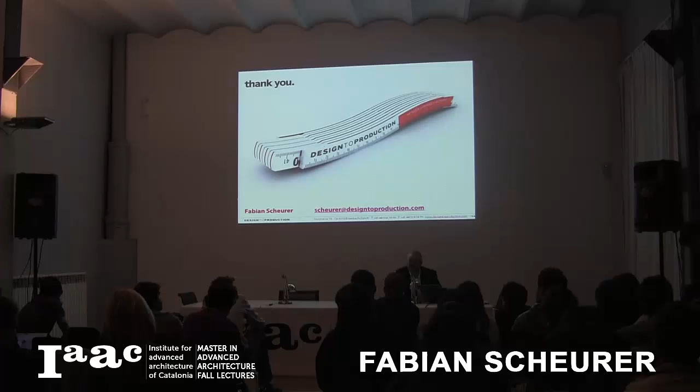as opposed to probably milling concrete formwork out of extruded polystyrene or stuff like that, which is another option that was discussed, but was impossible due to the scaling problems that I tried to explain in the first or second project. Yeah. Thank you.